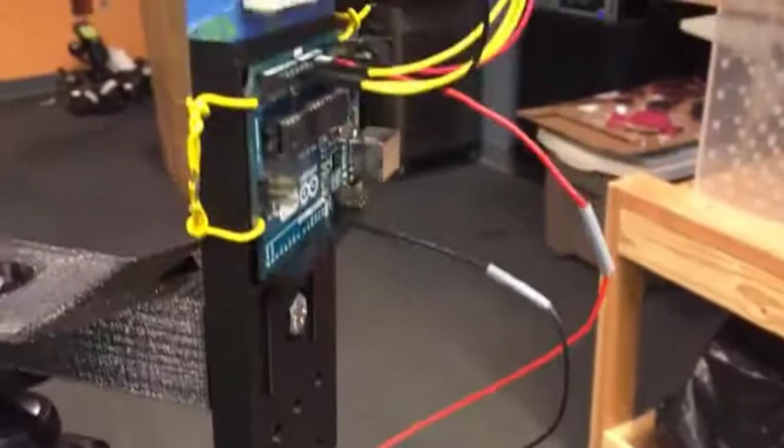Hey guys, my name's Trisha, and this video details my final project for Dr. Mitchell's class, ENME 489Y. The overall goal of this project was to render a 3D point cloud of campus one structure at a time. This was done by deploying our individual LiDAR sensors to map and collect images from any selected target. We then took these images and were able to generate a 3D point cloud from which we analyzed and processed the data to render a discernible mesh.

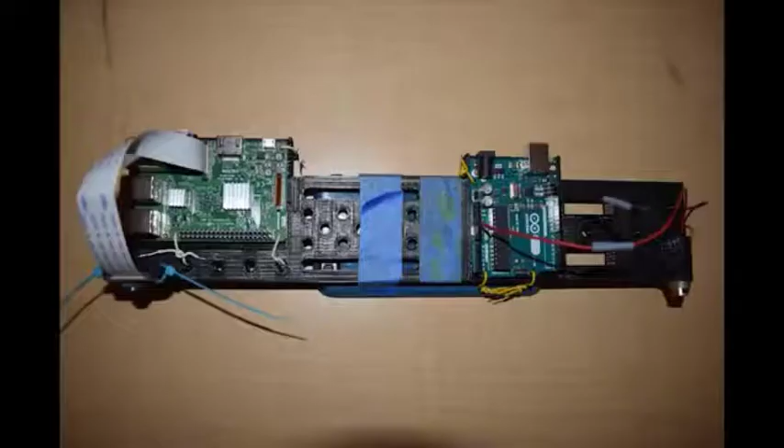The target that I chose to map was the Tau Beta Pi bent. The Tau Beta Pi statue is located in front of Martin Hall, closer to the entrance to Resnick Lecture Hall. So I chose to map this particular object for two reasons. One, I'm in Tau Beta Pi, and two, I thought the geometry of the overall structure would be pretty interesting to recreate. So the top is made up of some sort of metallic brass material and is pretty geometric in its profile. The bottom is also geometric and is made up of some sort of concrete mixture.

The bottom cube base has sloped faces on both the rear and the front, and the top is mostly made up of just angles and straight lines. The only exception is at the very top of the statue where there's a keyring looking fixture, and it would be interesting to recreate the curvature on this.

This is my overall LiDAR sensor configuration. To sensor map something, you need both a transmitter and a receiver. The transmitter here is the red line laser affixed to the bottom of this mount. The receiver is the Pi camera, which is mounted at the top of the mount. For the base, I chose to use the provided STL files for the 3D printed mount. There was slight warping in this print, but it still maintained the proper separation distance and dimensions. The base was then bolted onto a tripod for stability, as you can see in this video.

A lot of the individual components were fixed to the mount using a variety of methods, so either tape, zip ties, or even just twisting spare electrical wire. My original sensor configuration used the Arduino accelerometer chip, but based on the results of earlier homework assignments, I realized that the offset angle calibration was causing my data to become skewed. From there, I switched to using a bubble level app on my phone, which you can see attached to the backside of the base. A lot of the technical operations of the sensor design will be discussed later on in this video.

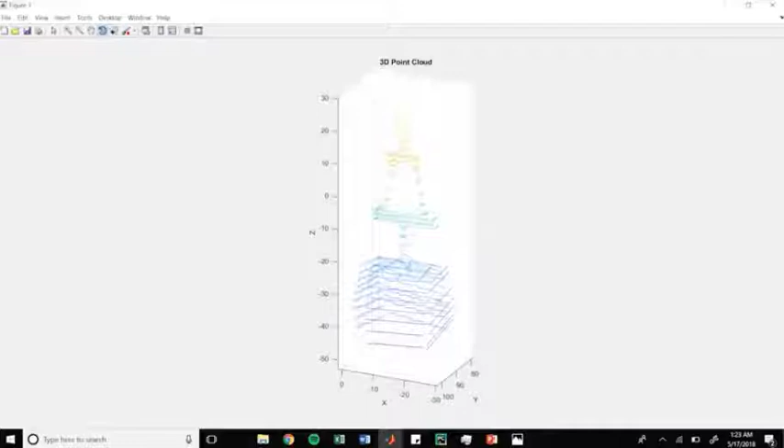However, when you're filming the left side of the bent, the lamppost makes the really reflective surface of the bent reflect that light directly, and as a result, it kind of drowns out the reflection of the laser. One thing I had kind of forgotten about was that Tau Beta Pi shines the bent every single semester, and I had just mapped on the shiniest point the bent would ever be. One way to circumvent that was to move my head to create a shadow on that point on the bent, and thus make the red line seem more apparent.

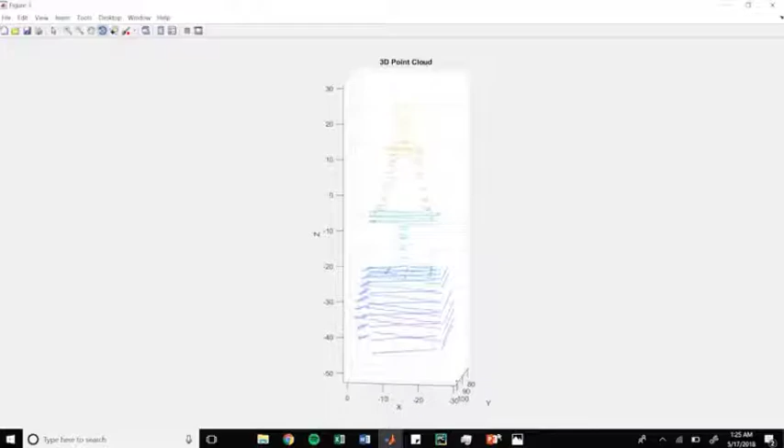This code starts off by loading all of the preset values. As you can see, these were part of the calibration curve. It then goes on to load in all of the angle values. So the IMU angle that was inputted in the Python script on the Pi was saved as the file name and is then read in again here.

The Python code in PyCharm then blurs the image, and based on the set HSV values, it creates a mask. That mask is then what helps to define what are red pixels for the returns and what are not. From there, it determines the pixel location and appends this into a matrix for the X, Y, and Z coordinates. After that, you get a resulting text file which has the 3D point cloud. That is then inputted into MATLAB over here, up at the top.

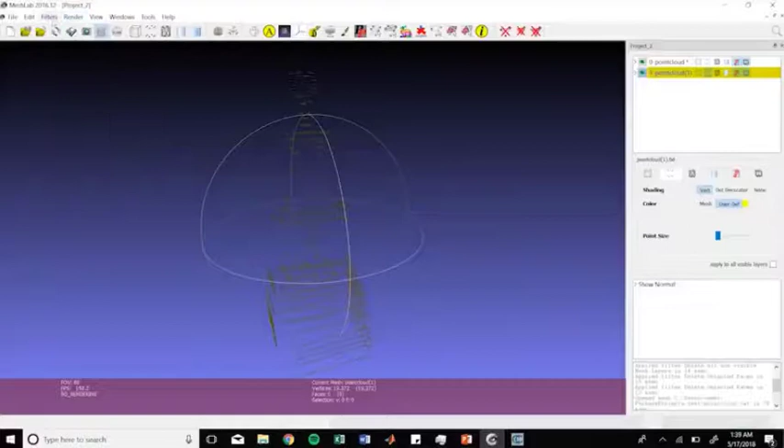Going back to the MATLAB code, I filtered the data from each of the data sets just based on simple conditional statements, whether or not that data was considered an outlier or just well out of reach of what surface I'm looking at. So I did that for all 4 of the faces. I didn't really filter the data beyond that or add any smoothing functions.

I then went on and rotated the data, since when you're mapping, you're only mapping one face relative to the camera. It's not exactly representative of the orientation of all the faces. So I just rotated it about the z-axis. For the back face, I also needed to rotate it about the x-axis just because it was slightly tilted, and I think that was due to the tripod being uneven.

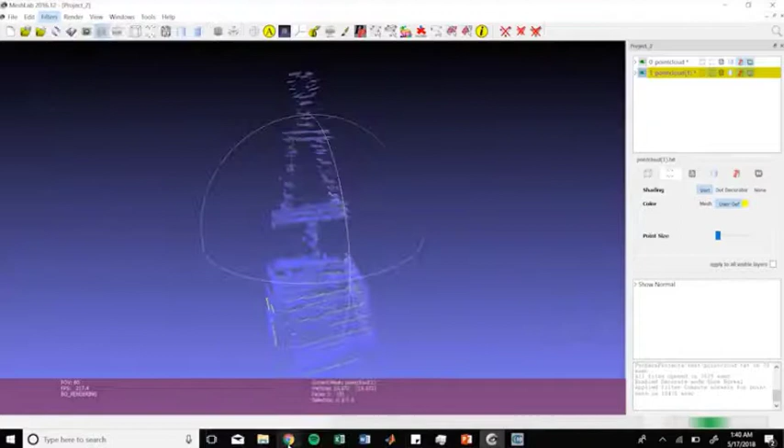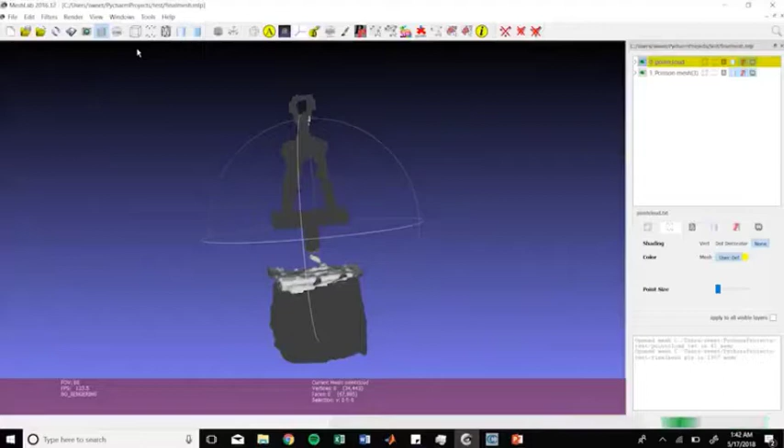The front face was set as a standard, so that didn't really need to be rotated. I also translated the right, left, and back faces. Once you rotate it, you exacerbate any deviations or translation offsets, and so those need to be placed. I chose these translation numbers just based on playing around with a point cloud. So I would try to find shared features, such as, let's say, two corners, and just try to match those two corners based on selecting their X, Y, and Z coordinates, and I can show that later.

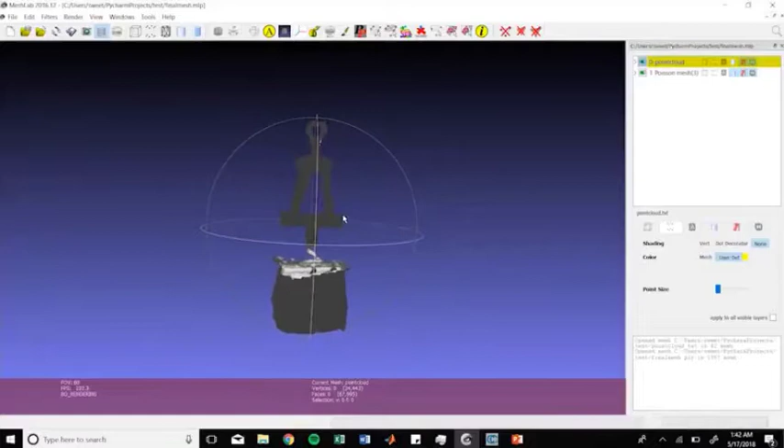I then appended everything into one total matrix variable, and then did a final cleanup and wrote that to a text file. Once you plot it, the resulting point cloud looks like this. As you can see, it pretty much looks like the Tau Beta Pi bent. What I meant by choosing points is just a feature like this. You can click on it and it would show you the X, Y, and Z coordinates that are relevant.

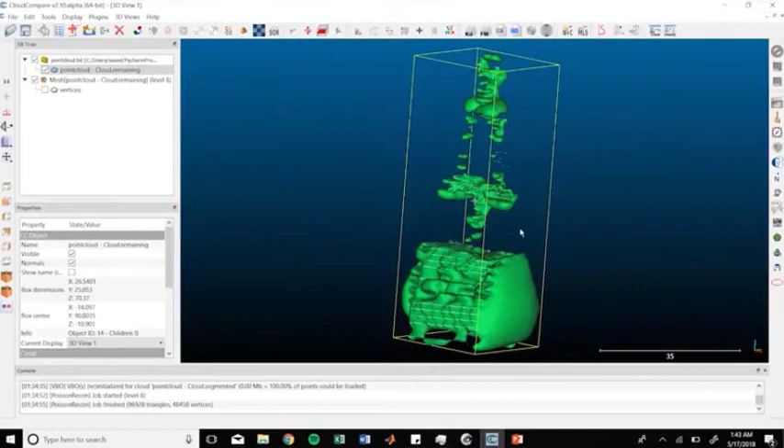You can see each of the four faces of the bent, the front, left, right, and back, and you can see the overall profile of the trestle on top. There are some points in the point cloud that are pretty sparse or low density in data, and that just may be due to the resolution of the angles. Furthermore, you can notice that the lines are at an angle, and that was mostly due to the fact that the laser was glued in at an angle. It was calibrated with the camera, but that just resulted in angled returns.

Once the final text file has been created and all the relevant data stored to a single file, this file can then be imported into some sort of mesh software to create a mesh. How that's done is you just select the file of relevance. In this case, I use a space as a delimiter, and you import it. So this is the resulting point cloud, the same thing we saw in the MATLAB image, but just now in the software called CloudCompare.